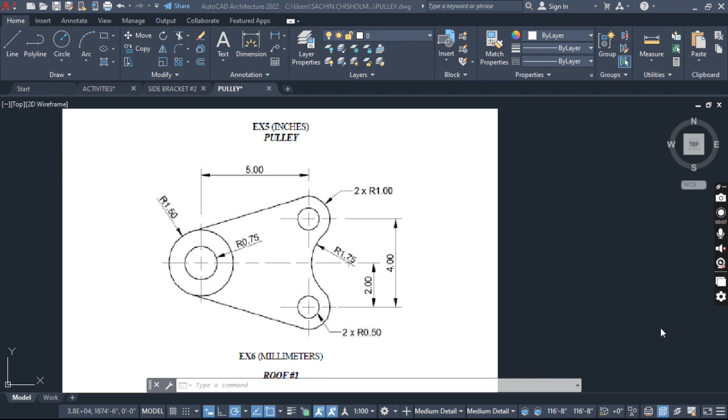This video will show the demonstration to complete exercise number 5 of the Intro to CAD worksheet that we have been using. I already went ahead and saved my file as the name of the activity, that's pulley, and I also set my units.

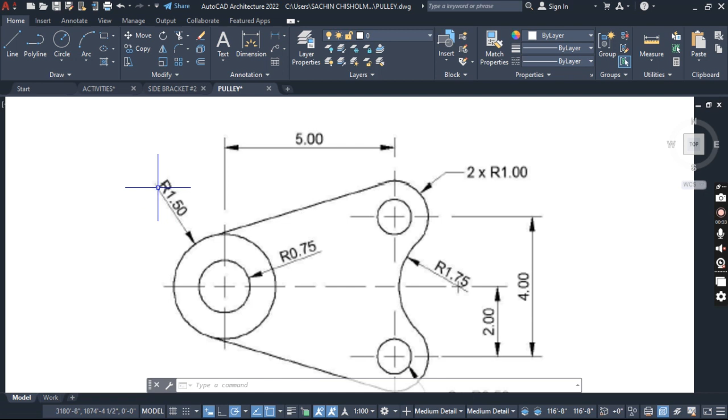In this drawing, we realize that we are working with a lot of circles, and we're given measurements for the circles such as the radius. So let's go ahead and draw the first two circles. The easiest part I'm seeing here is the two complete circles at this location. One of the circles is 1.50 in radius, and the next one is 0.75.

Let's draw the inner one first. The inner one is 0.75. So I need to start my circle command and specify where I want to start the drawing, that's here. Radius is 0.75, so I enter 0.75 and press enter. Once I do that, I get my first circle.

To get the second circle, restart the circle command. You can just put your crosshair on the circumference of the circle and you will see the center being highlighted. They have the same center, so you must start in exactly where you started the next one. So this is the center, and I'm going to enter the radius, which is 1.50. Now I have two circles.

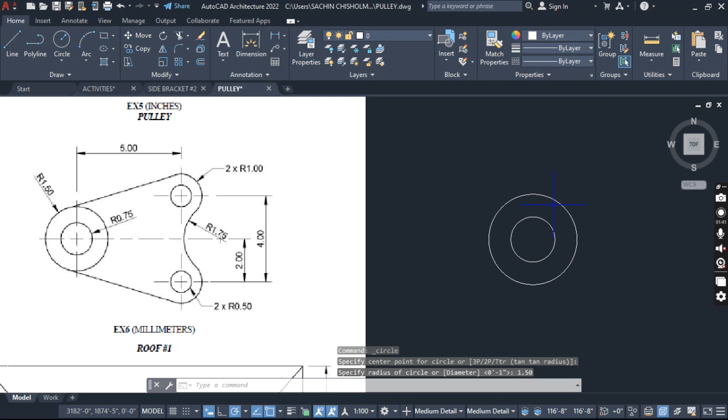Based on the drawing, I realize that the other circles located to the right of the first circles we drew are 5 inches from that circle, and they have a different height. The measurement is from the center, so from the center I'm going to draw a horizontal line, 5 inches.

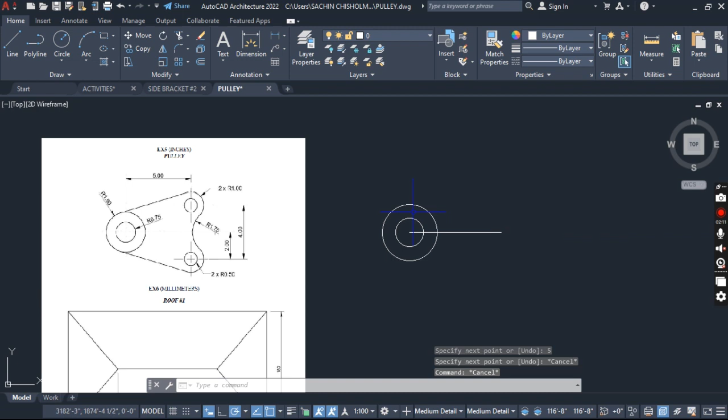After I draw that line and look back at my drawing, I realize that for each of them, from the center of that line I drew, the other center is located 2 inches vertically. So I'm going to draw a vertical line from here, 2 inches, and then another one, 2 inches.

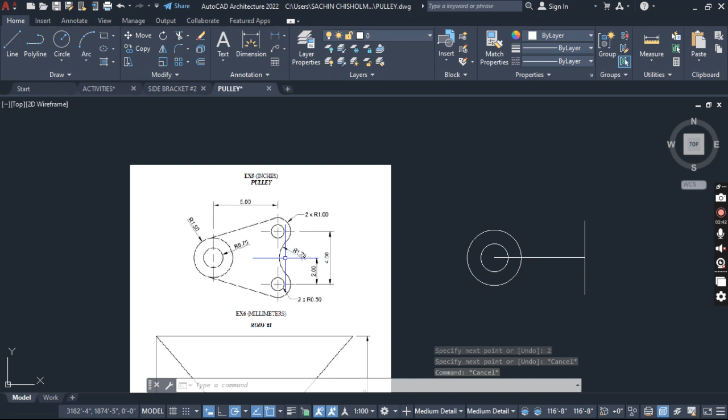Now I have the centers for the other four circles that I'll need to draw. Let's start at the bottom one since we have the radius of the inside circle down here. The radius here based on the drawing is 0.50, and the outer circle will be 1.

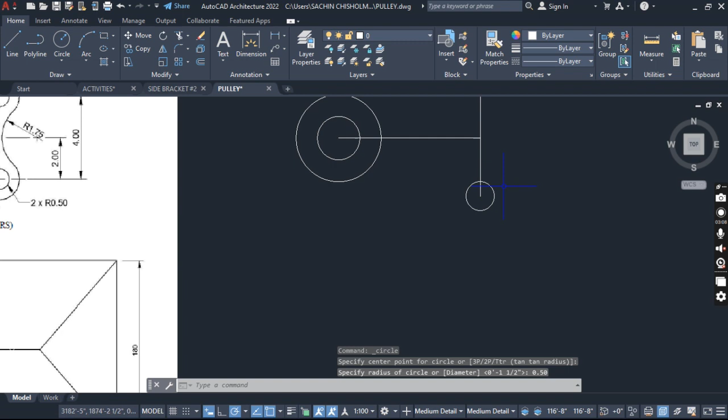So let's draw those two circles. Circle command, this is 0.50 radius, press enter, and then the next one is 1 inch. So I start my circle command, enter the 1, and there I have the two circles.

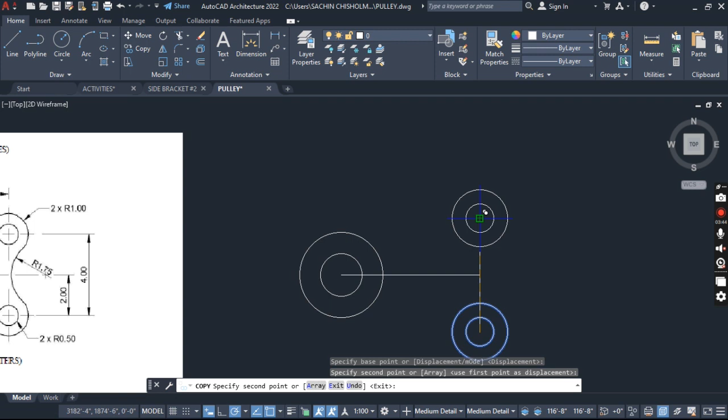When I am drawing, I always try to work smart so I can save time. So what I'm going to do is highlight both circles and copy. I'm copying it from this point, from the center, so I must click where the center is, so when I paste it up here, it will be accurate. I'm going to go ahead and paste, and then I have the two circles.

Now I can go ahead and delete all of this. Let's draw these two lines that are blending with a tangent. Let's draw this tangent that is blending with the circle.

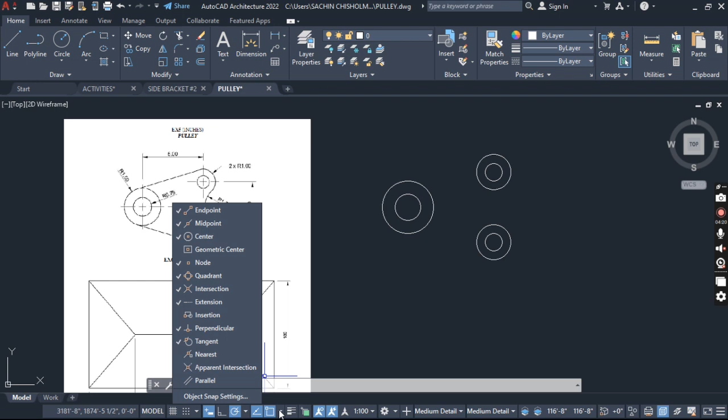To do that, I must ensure that I have my tangent snap turned on. I'm going to click object snap, that's this box in the status bar, press the arrow and look for tangent. Now I'm going to go ahead and start the line command.

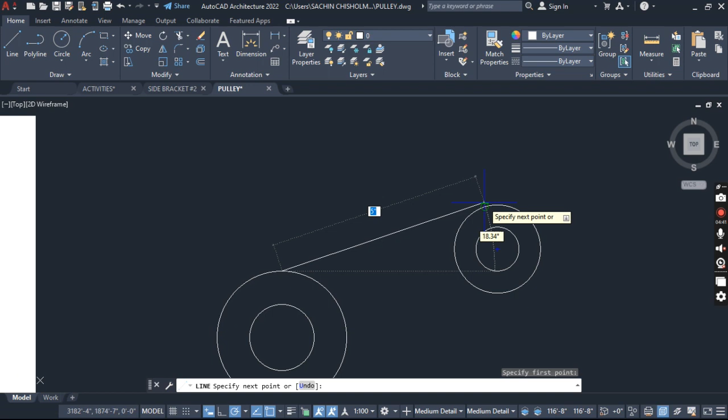I'm going to click where the quadrant of this circle is, and then I just move it to the other circle to find the tangent snap. Once I see the tangent snap, then I click.

All right, we can fix this one. Just highlight it, put the crosshair in the endpoint, click, and move it until you see the tangent snap.

There, I have it. All right, we need to do the next one. I'm going to click where I'm getting this snap here, and then I look for the tangent snap on this side. Once I see the tangent snap, I go ahead and click.

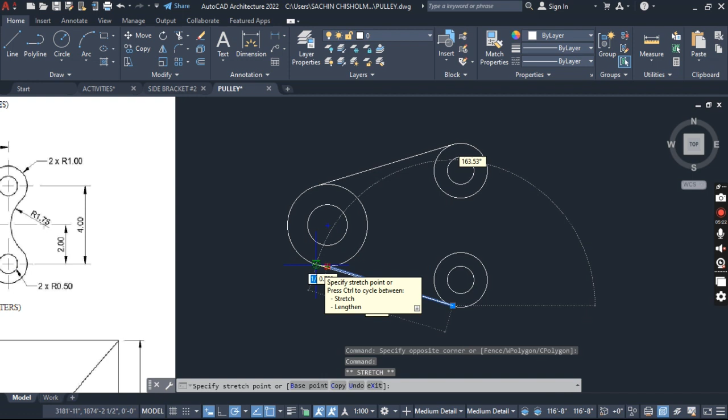All right, I highlight this line, and then I'll move it until I see the tangent snap. So we're almost through with this one. We now need to get one more circle in the center here.

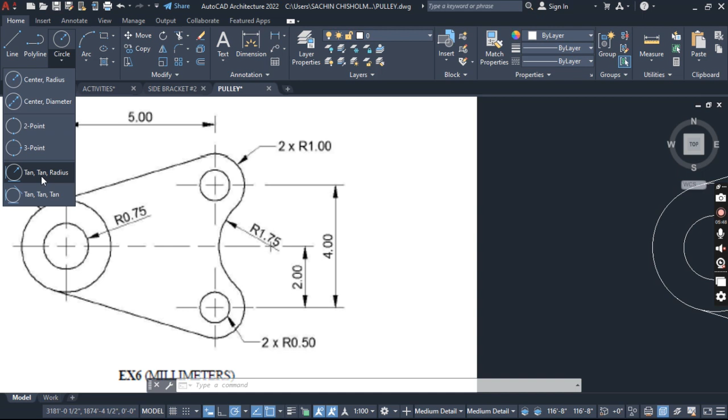All right, there are two ways you can do this. There's this circle feature here that's called tangent radius. Since we're given the radius of this, radius is 1.75, I could use this tangent radius.

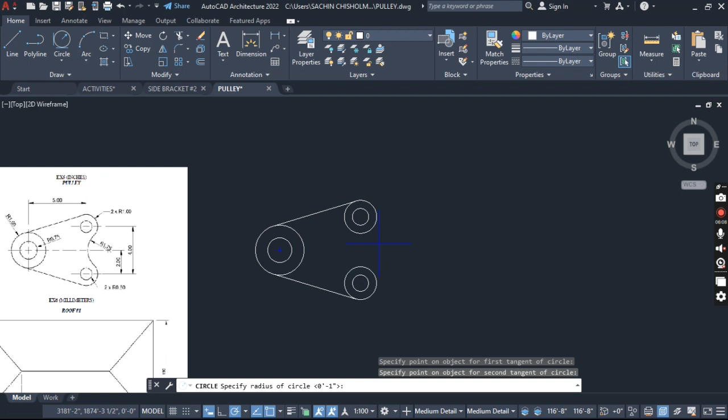So this is a tangent. We know that's a circle touching a circle. They will create a tangent, right? So we know that it's a tangent here, it's a tangent here, and the radius of the other circle is 1.75. So I enter 1.75, press enter, and then I'll get the circle.

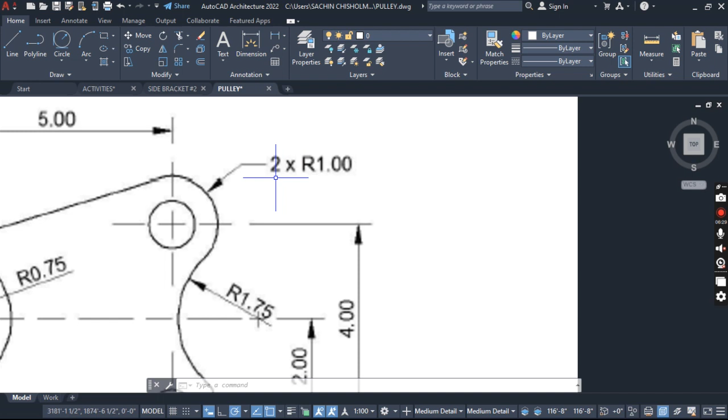All right, or we could interpret it this way. We have a circle here that's touching a circle here, and it's also touching a circle here. So it means that we would have to add the radius of this circle plus the radius of this circle to establish a point.

And then we'll do the same thing down here. We add the radius of this circle and the radius of this circle that is touching to establish a point. So let's do it that way.

To do this, I'm going to use the arc command, center start end. I know that it's touching this circle, and the radius of this circle is 1 inch. The radius of the circle that is touching it is 1.75 inch. So I'll add those, and I'll get 2.75.

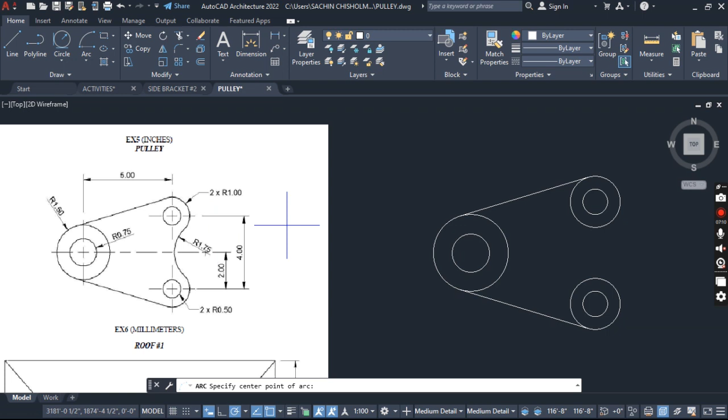So from the center, I'm going to draw an arc here, 2.75 inch. When I enter the measurement, I'll realize that if I move up, I'll get an arc. If I move down, I'll get a circle.

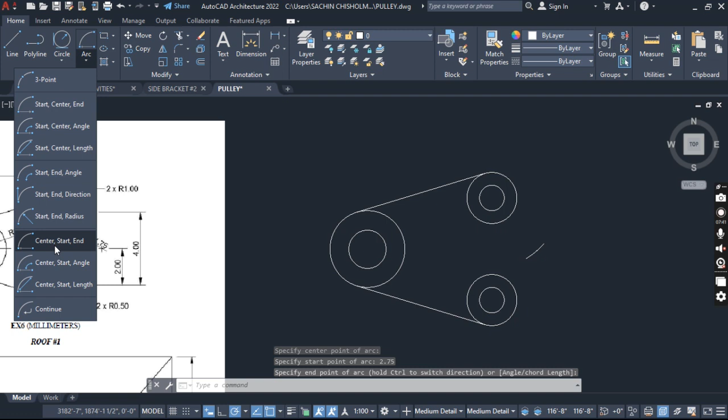To change the direction of the arc, what I can do is press and hold Control. Once I do that, then I'll get the arc. I go ahead and go back to center start end, click in the center of this circle, and then I type...

1.75 again, enter. No, it's not 1.75, sorry, it's 2.75. We type 2.75, enter.

And then you realize that the arc is pretty much in line with where we have the previous arc. But if I move up, I get the arc. If I move the other way, I get a part of a circle. What's happening is that the arc was started here, so if I move up, I'll get the arc. If I move the other way, then the arc would have been started from around here and then come all the way here.

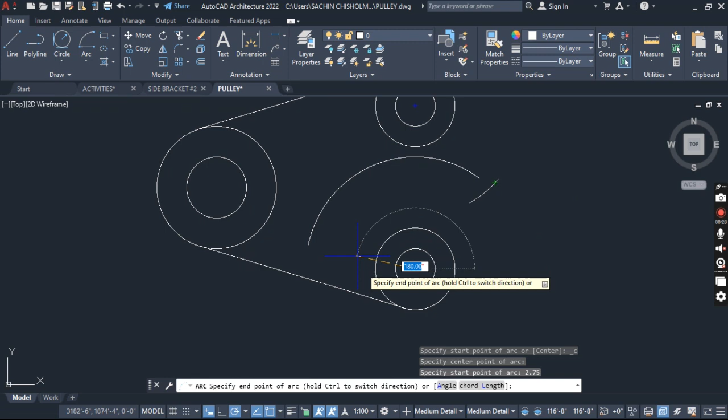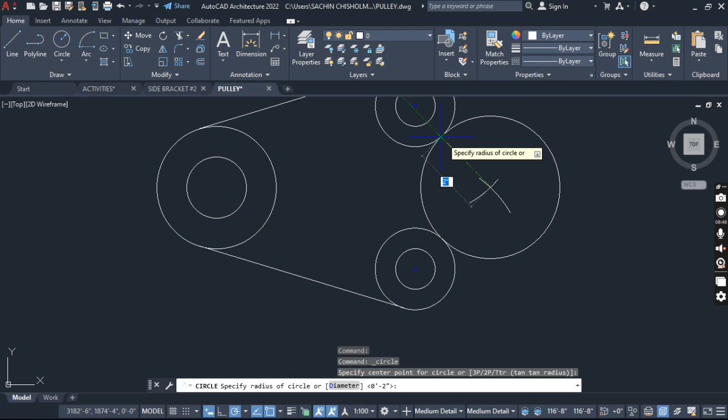But to change the direction of the start, I can press and hold Control, and I move down, and I get the intersection. From there now, I just need to go to circle, center radius, click where the intersection is, and then the radius here now would be...

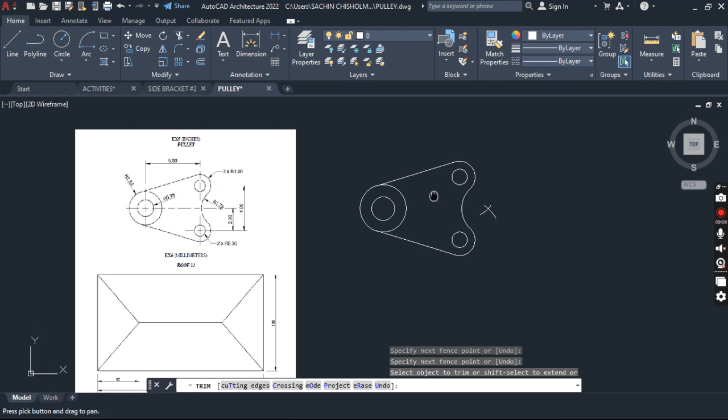1.75. All right, and then once I get that, I can go ahead and trim what I don't want. So I don't want here, and then based on the drawing, I do not want this, and I do not want that. All right, so that's how you complete exercise 5 of the activity sheet.